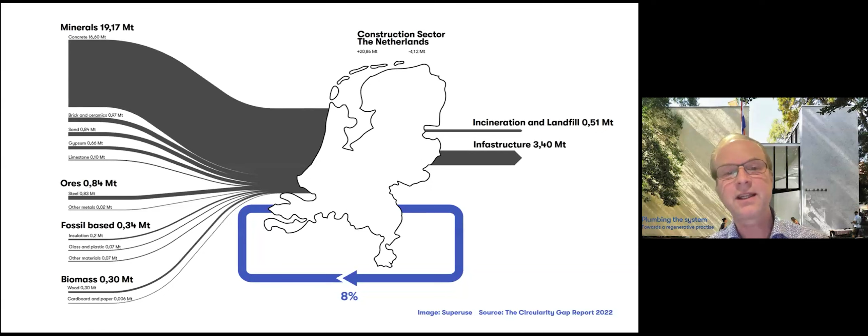When we started our office, we thought it's enough to just show it's possible, to prove with built examples that already today it's possible to realize buildings with over half of the materials being reclaimed. One of our first built examples was Villa Welpeloo, a house for 2 art collectors in the east of the Netherlands, who allowed us to build this house according to our Superuse philosophy.

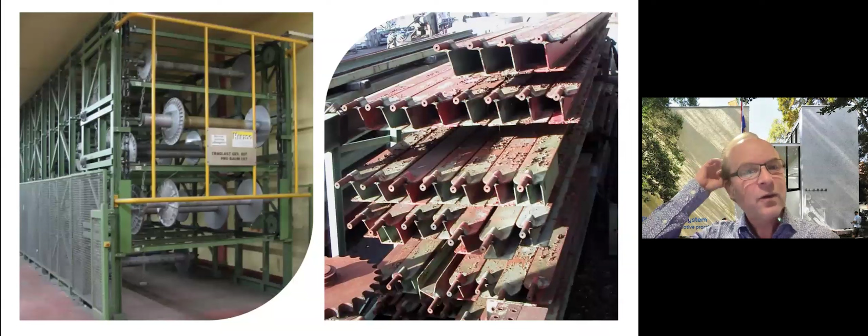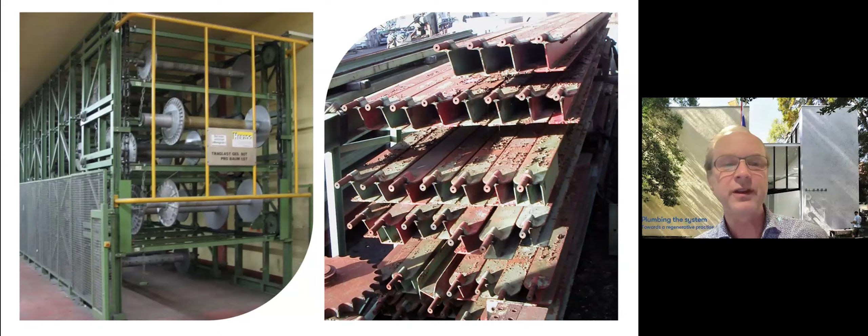What we used were steel beams from a steel textile machine that we bought and turned into the main construction of this house. We didn't know any specifications, but together with a structural engineer we were able to work on this project and realize it, and calculated that we saved around 90% of CO2 emissions by repurposing steel instead of recycling steel.

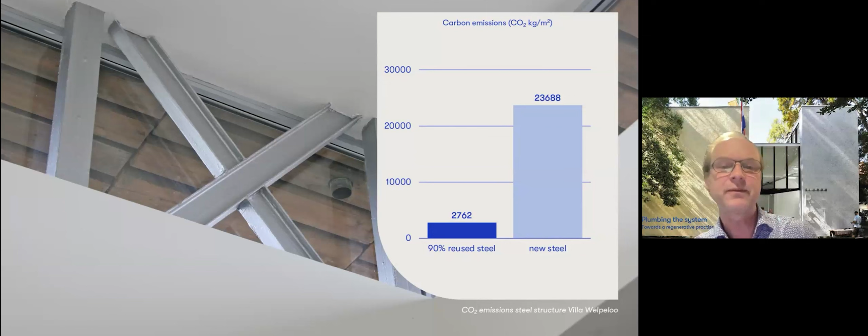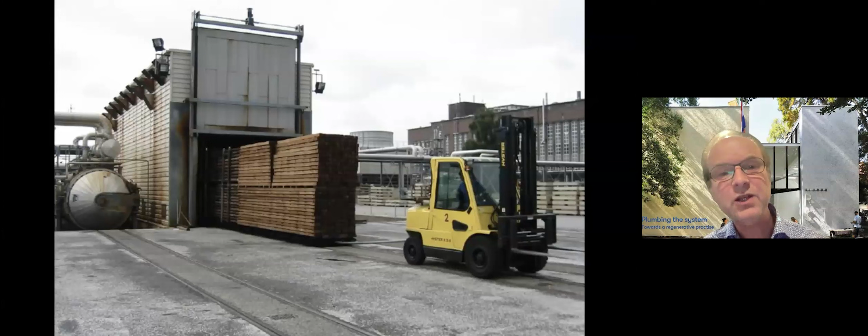Another material we used was wood. The whole facade has been made of cable reels, a material that becomes redundant after 5 years of use. The boards are very sturdy, same-size boards that we could use for our facade. We found a treatment that actually enlarged the lifespan of this material up to 35 years of guarantee.

Unfortunately, this factory that treats this with just steam was 100 kilometers away. So here I must say that we were actually able to have a design that was the result of the size of the materials - that's how we design. But the CO2 emissions were not that much less than using new wood. Of course new wood has a low impact, but because of the transport we only gained 20% compared to using new wood. These were 2 of the examples we learned from and could employ in other projects afterwards. We realized this project in 2009.

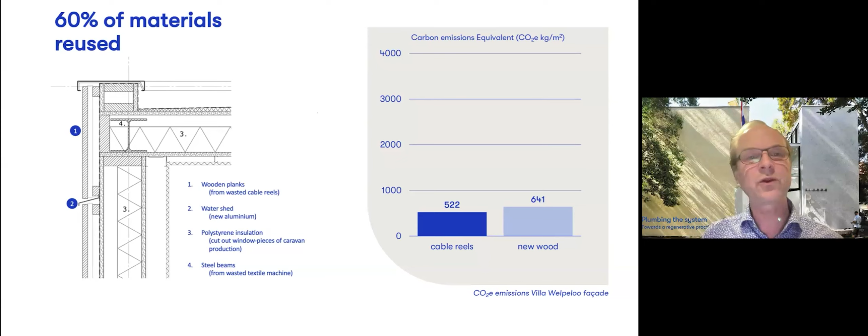Today we need other tools to understand and be able to work in this same way. That's why we invented a platform called Harvest Map, which allows other designers and builders to work with the knowledge we gained. After 15 years of working, we had many different sources of materials that we knew would be applicable in construction, but that we wouldn't use because they were not local to the project we were working on at that moment.

So we made a map with over 250 resources in the Netherlands, with many different varieties of applications - for instance parts from trains, buildings that were demolished, as well as furniture that was taken down.

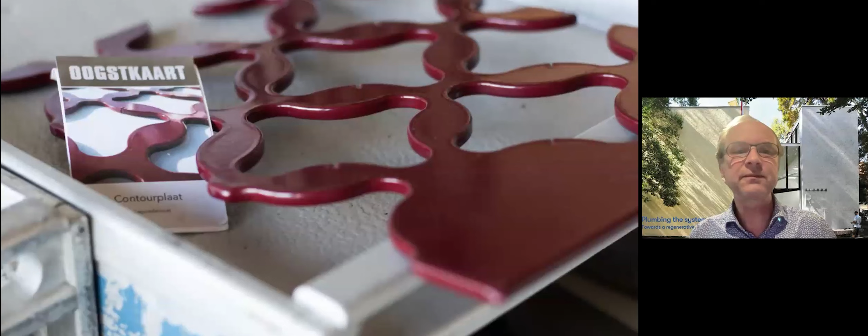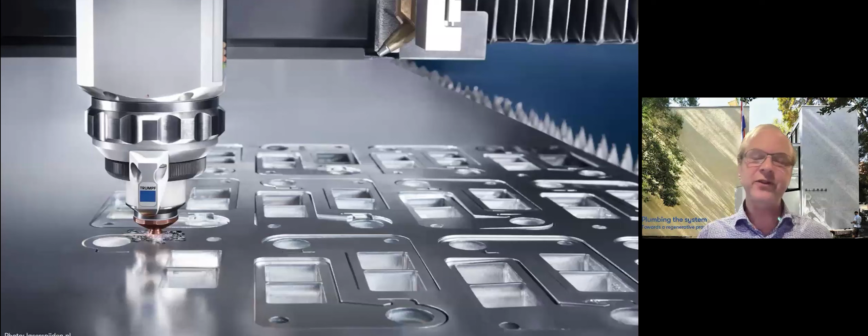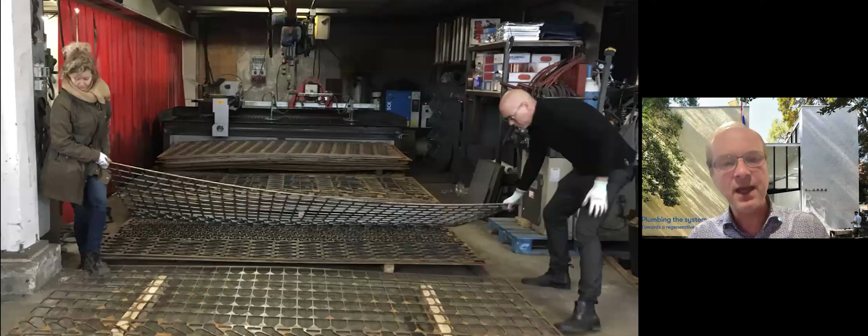One of the materials on the Harvest Map is this one, it's one of our favorites. It's called contour sheet — the remains after the steel industry takes out different parts for the car industry, leaving a steel sheet of the same size, though thickness and type may vary. Instead of scrapping this into small parts and transporting it around the globe to turn it into a new product like a fence, we buy it directly from the factory at a 3 times higher price and apply it for buildings. This can be used for fences, like next to the villa I just showed, to grow plants and give a bit more privacy.

But as well, other architects hire us to matchmake the supply with the need, here for a facade of a museum in Amsterdam.

And we had this same consulting matchmaking role for this large venue and waste collection center in the center of The Hague, where the municipality, for the first time, set the brief on the highest amount of upcycled materials that would be possible.

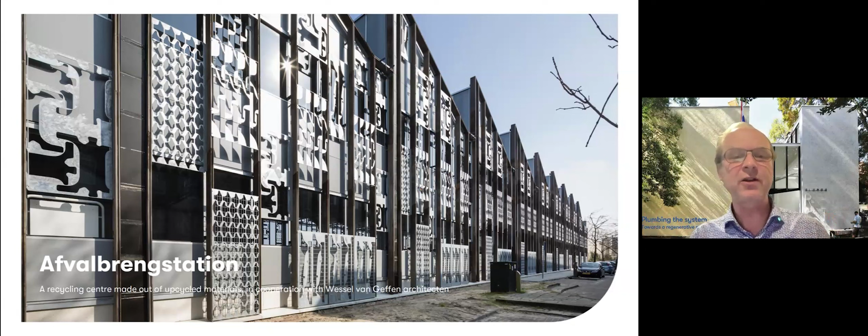The nice thing about this project is that it's not just a skin for any program, but the collection of waste material by the general public is the core of the project, and the aim is to upcycle these materials in the future. We rather call this a resource palace than a waste collection center. That's what we need to go to — to really give materials that used to be waste a higher value, also in how they're looked at.

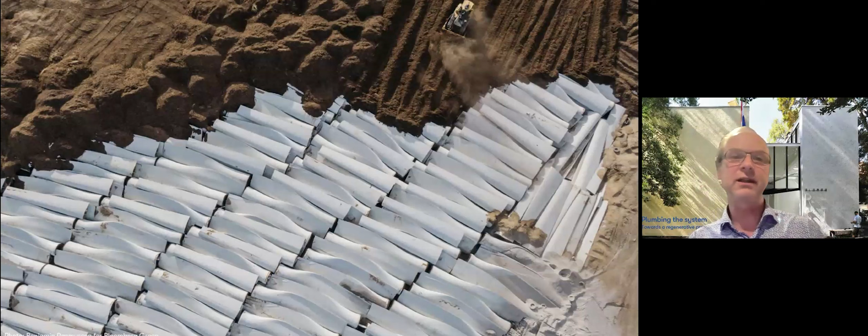Another material we use very often is blades from wind turbines. Our green energy does not just use green resources — it provides green energy, but the materials they're made of are actually glass fiber and polyurethane. They were never invented to be recycled or upcycled, and for a long time they've been put in landfills or, in Western Europe, incinerated, while this is a very high quality material that can live for at least another 50 years.

So when we were commissioned for the playground in the city of Rotterdam, we had just learned about this new material and used 5 of these turbine blades to create an exciting new playground, where we drilled a couple of additional holes and connected the existing stainless steel parts, which could live for another 50 years as well. Kids very much like it, because you can't just play over it, but also play hide and seek inside it. Again, we were able to save 80 to 90% of CO2 emissions by not using new materials and not having these turbine blades incinerated.

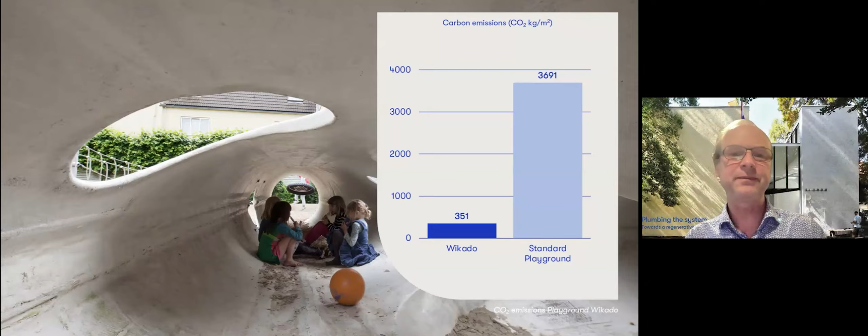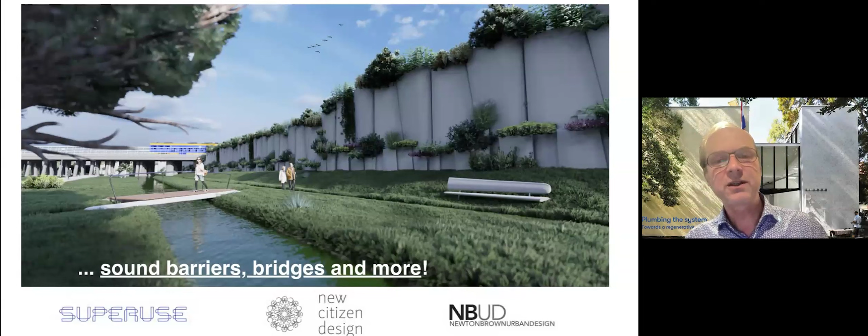Since the flow of these materials is enormous — every year tens of thousands of blades are being decommissioned in the coming years — we started to look at larger scale applications, because we cannot absorb all the turbine blades just for playgrounds or urban furniture. So currently we're looking into sound barriers for railways or roads, which have a multiple function: to store water and to grow green, diminishing the amount of fine dust generated by roads and railways.

Since this year, we branched Blade-Made into an independent company because we have a growing demand for these products, and this company can really dedicate itself to the application of blades in the urban environment.

If we look at more historical wind turbines, we think they might be much more intelligent than the ones we are building now. The current ones just have one function, one output, but 400 years ago in the Netherlands we were able to build buildings that harvest their energy, fabricate new products, house the people who work there, have a shop to sell the products, and were built out of natural materials and could be dismantled and put up somewhere else. A completely integrated design - this intelligence we lost a little bit in past years, and we started calling this cyclifiers as a new function in our city with the contemporary flows we have to deal with.

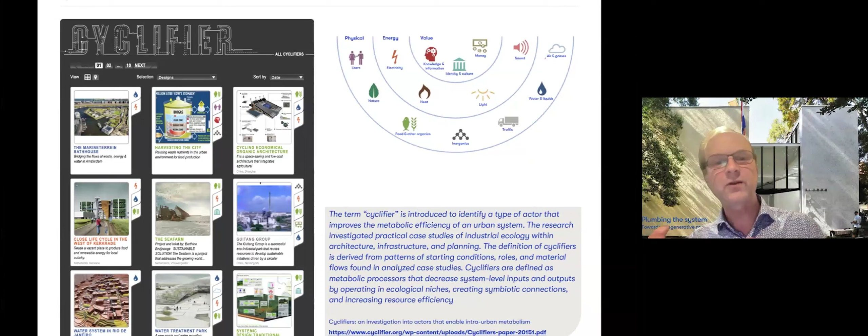We're currently looking at 14 different flows in cities and trying to see how we can create more value with what is available.

One of the cyclifiers, actually I'm presenting from this location, although my background may look like I'm in Venice, is Blue City. It's a former tropical swimming paradise that got derelict in 2010. With a group of entrepreneurs, we were able to acquire this building and transform it into a hub for the circular economy.

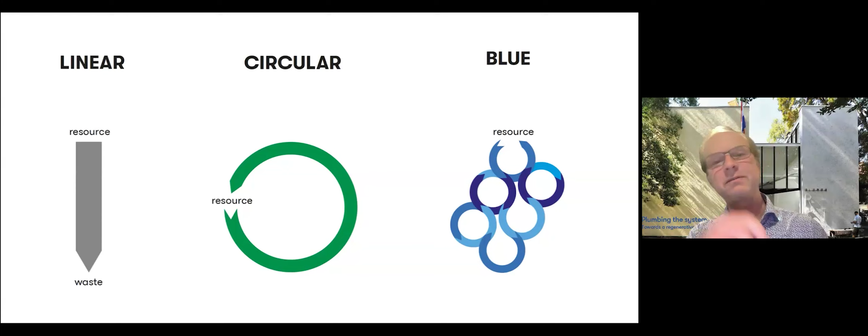I have to make a small addition to what we call circular, because the transition from linear economy to circular economy usually means materials are cycling in a closed loop. But if we look at nature, a leaf falling from a tree never becomes a leaf on that tree again. So we are more looking at an open system, more natural, where resources that become waste can be absorbed by other companies, creating the highest possible value, and in their process have resources that can be used by other companies again. It's more like the blue economy, which is more dynamic, interactive and open.

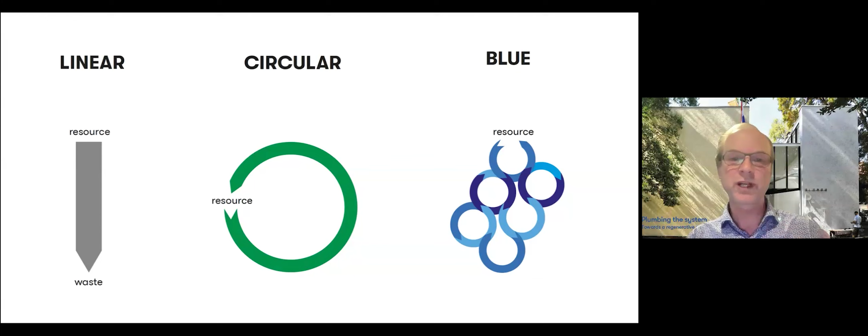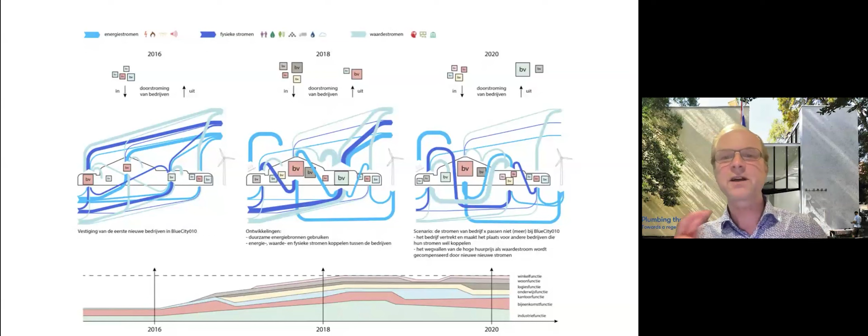In Blue City, we made a system where in the beginning we have only a few companies, but by plugging in more companies, they can start to exchange these resources with each other.

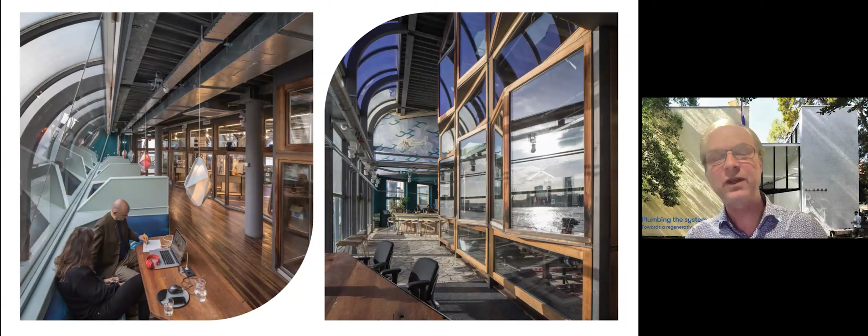We started with creating office spaces, having 90% of reclaimed materials applied here. This was really a nice challenge to see if we could create this office environment only with reclaimed materials. We also have a central lab for the now 55 entrepreneurs in Blue City, and the ability to actually create new building products.

After the building is completed, in this case the laboratory, we calculate the amount of CO2 that has been saved by implementing harvested material compared to new material.

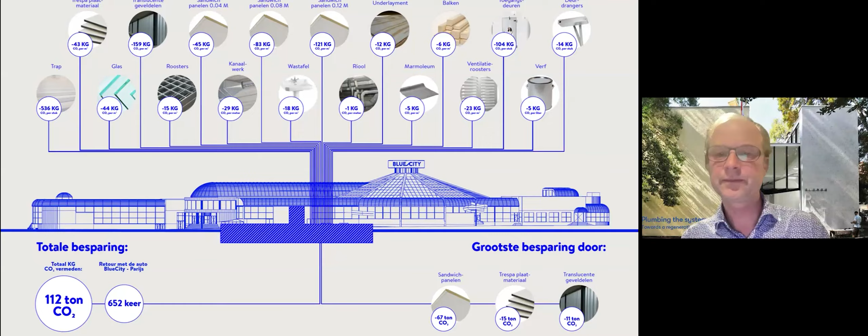Blue City is an ongoing project. A project that just has been completed is this one in Den Bosch. It's a former public facility building that was built in the 1980s - not very nice, but interesting that a housing corporation decided this location should be demolished and turned into apartments for new renters.

But there was already an organization of 15 people who temporarily used this building, and they suggested not to demolish it, but to become renters and refurbish the building.

So we made an analysis of how we could use the existing structure, build on top of it using the existing foundation, keeping most of it, adding an energy system that uses the passive energy generated by the building envelope, have a green roof and garden system where most of the food they consume can be grown, as well as collecting the water falling on their apartments for local use.

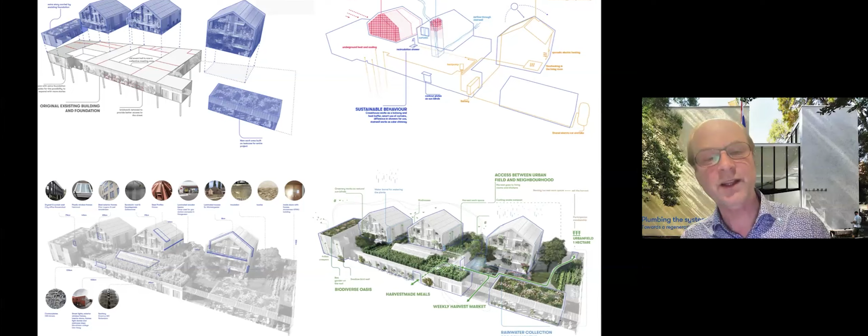And of course to have most of the materials harvested where we built new, on the parts where we built new apartments. This was the design we made 4 years ago, where this is really a new vision on how social housing could look like.

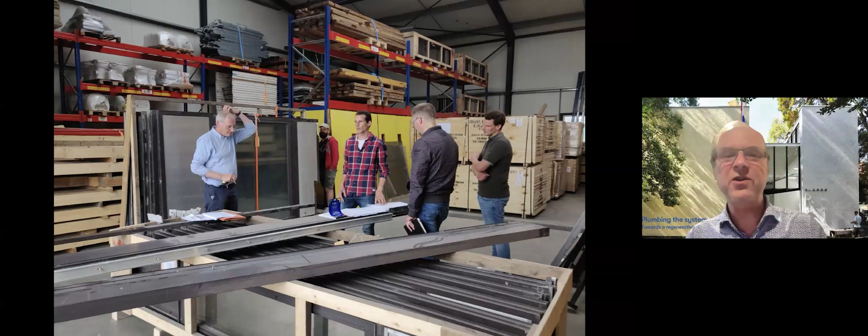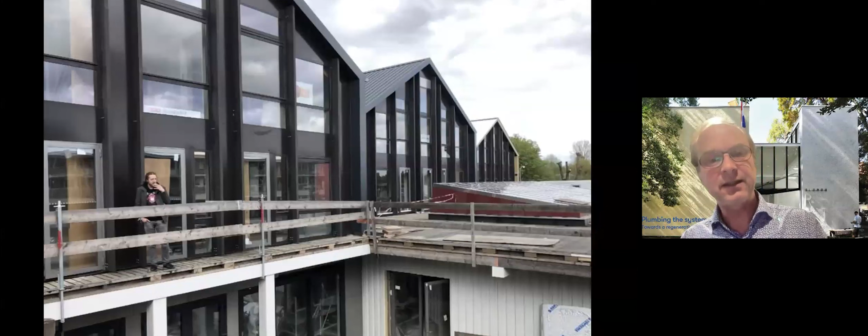This didn't stay a dream - 4 years ago the construction started, materials were collected, different materials were stored in a large storage, and with the help of the community that is going to rent their houses, materials were prepared and then applied by the contractor. In the end, the local community also finished their own houses.

The whole building has been completed by the end of last year, but was actually opened 2 weeks ago, and now the green is growing.

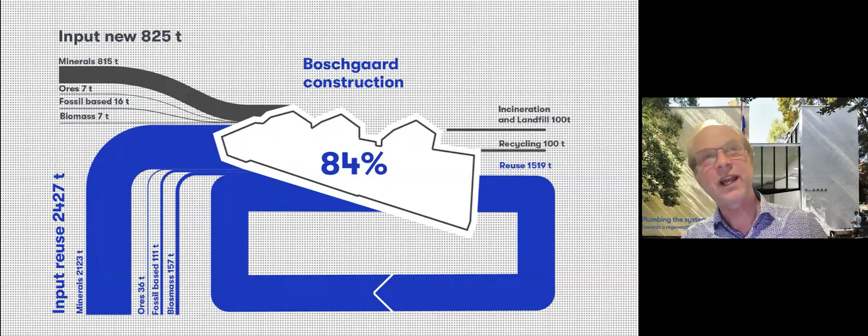What is nice is that in such a project we're able to realize a circularity of over 80%, which is more than 10 times the standard currently in the Netherlands. We think this is only possible if you collaborate with the local community, because they set their own circular and sustainable ambitions, and collaborating with them as an architect and housing corporation creates much higher sustainable improvement than doing this top down. So we think that's an important step: sustainable development should be done with a collective, from bottom up.

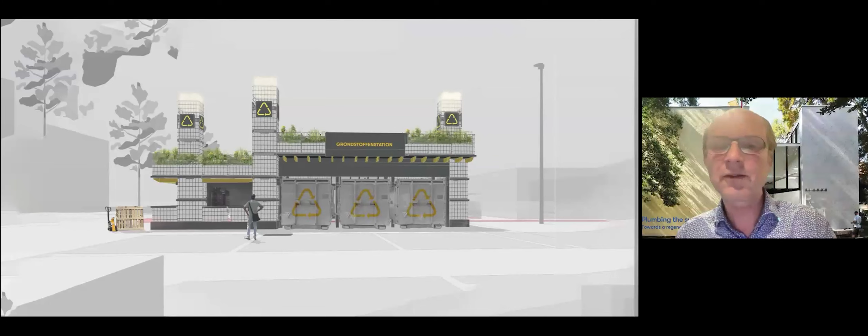Another very nice example of a cyclifier and bottom-up initiative is for the market in Rotterdam, one of the biggest open-air markets in Western Europe. After a day of market there used to be a lot of waste, collected by the municipality at the end of the day. A local cooperative made a claim, a right to challenge, to be allowed to collect the waste already during the market, to store it, sort it, and create more value with what was wasted. So we designed a resource station for that organization to support that whole process.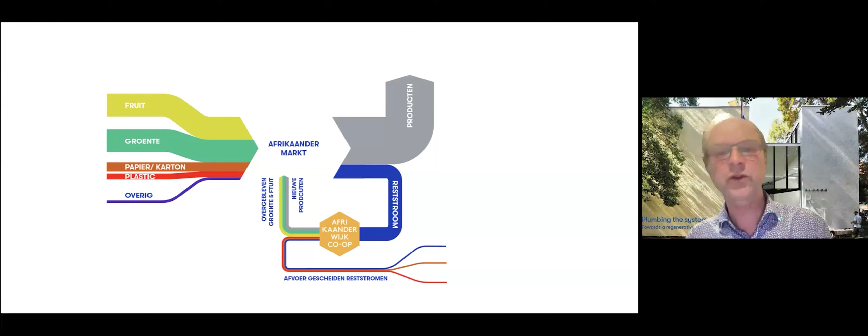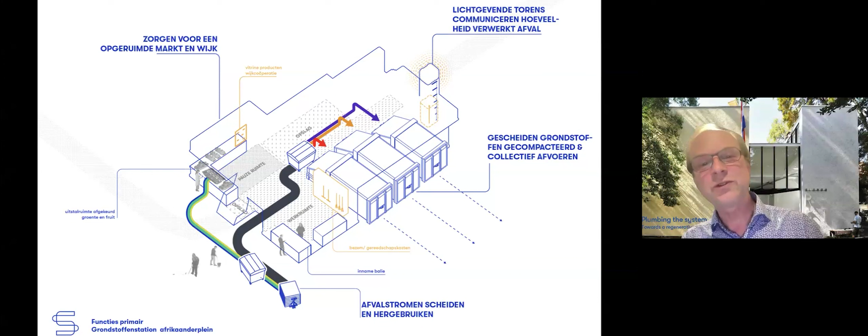The whole design developed quite a bit. It was a process of over 5 years in Rotterdam, dealing with many different parts of the municipality that had to collaborate, and they didn't know how, especially with a local cooperative and private organizations. It's not that easy, but we managed to design something we could build. This shows the industrial space inside where all these materials are separated and sorted, but as well outside we created completely new urban functionality for the city of Rotterdam by adding a running track over the station.

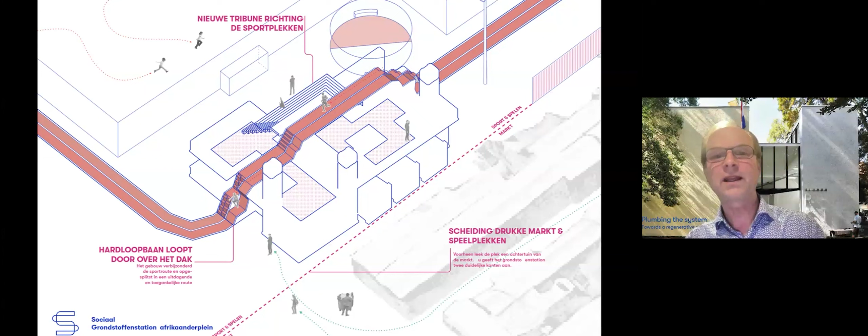And a grandstand to watch the football play next to it. We realized this last February, and again we're really very happy that we were able to realize a project with over 90% of reclaimed materials.

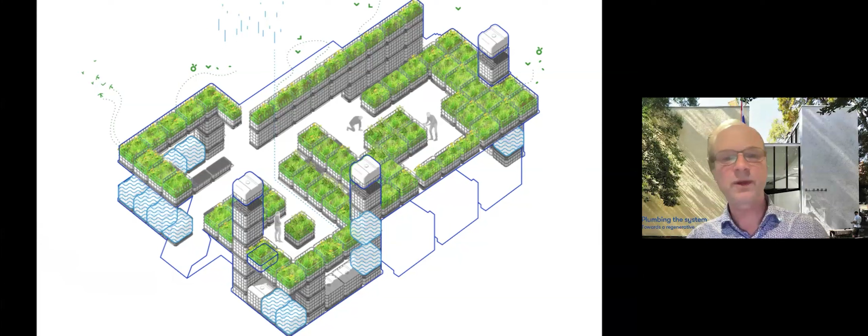One of the materials that really speaks are the liquid containers that come from the food industry. We could use them here to store water from the roof, but also to grow plants. In this case, each tank is a garden, actually managed by one of the school kids from the school you see behind, one of the tenants of the resource station.

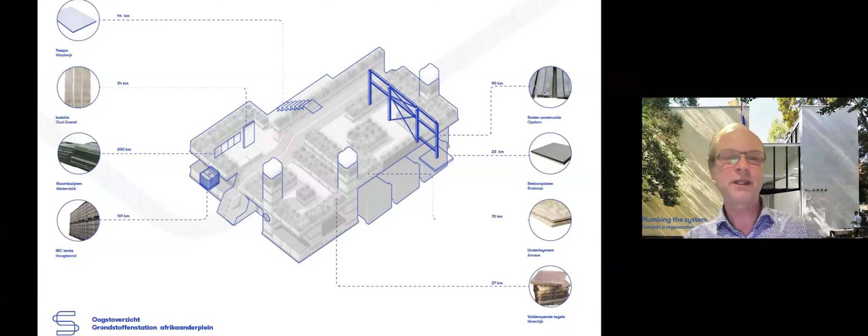This whole design and even the construction has been really locally supported, so it's designed with and built with the people who are actually going to use this. This again gives a lot of pride to the people working in it. And of course, we collected over 90% of reclaimed materials from a maximum of 200 kilometers from the site.

It's very nice that the project just last Friday won the Rotterdam Architecture Prize. So even now, in architectural organizations that are looking at where the future is heading, this kind of development is really seen as something very promising, as a new process.

I'll conclude with a more systemic look at our practice as an architect, because after working for over 25 years, we also discovered it's not just about creating new tools and showing that it's possible, because we found a lot of obstructions from all kinds of context we currently have to deal with. One of the important ones is our economical context. So that's when I became curator for the Dutch Pavilion in Venice.

I invited Carlijn Kingma, who made this incredible drawing called The Waterworks of Our Economy. She is an architect and took the system of money and translated it into a water system. This shows where the water and the money ends up, who gets more wealthy, and who doesn't get a drop from it anymore. She drew this by hand over 2,000 hours and 2.5 years of very deep investigation with banks, government institutes, etc. So it's a very well-informed visual of how our economy works.

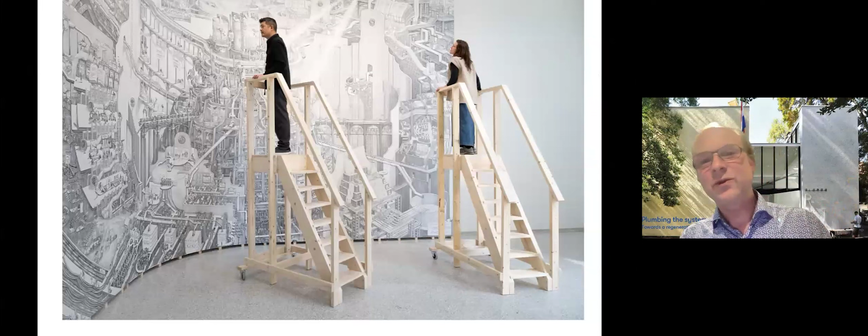We turned this into an exhibition, which you could actually more or less enter live, but we also started to look at what we can learn from this economy. I want to show two important drivers of why in general it's very hard for architects to work in a sustainable way.

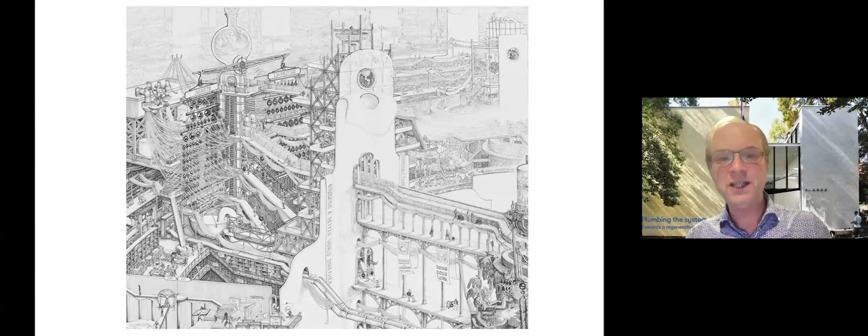One is on the left top, that's where money is generated. When you take out a loan, new money is created, and this leads to a very unsustainable need to grow. When someone gets a mortgage, 20 to 50 times that amount of money is actually generated and flows into our economy. But of course this mortgage has to be paid back with interest, aiming for a new growth model.

So we translated this into a simple idea: if we want to move into a more circular future, we cannot continue basing it on debt that has to be paid back with interest, aiming for high profit later. Instead we have to step out of debt and think more of a sufficient economy, where the money is enough to do what is actually needed.

The other part is at the back end of the system, where taxes are gathered by our governments. What we see here are the tubes of the taxes — the largest tube is income tax, the tax on labor, and a very small tube, even called 'other taxes' here, is on resources and materials, for instance.

That's what we also discovered. So five years ago we started to promote what we call the tax shift, because currently labor taxes are very big while taxes on CO2 and emissions are very low, which makes it very unprofitable to put in the additional effort of reclaiming materials, repairing them, storing them, or renovating buildings — the competition with new materials and new buildings is really very tough.

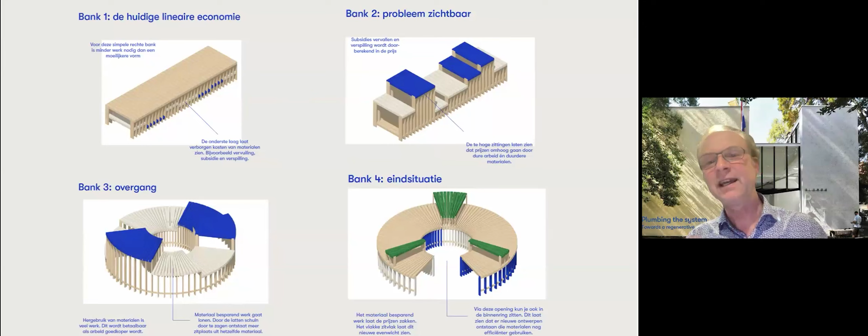The second bench shows that if you make the hidden cost more visible, it already starts to become less comfortable. If you lowered the amount of labor cost, you could cut every beam in half and make a round one. But as I said in the beginning, we want an open economy, so the bottom right one is the open one, where with low labor we have much more functionality even on the inside of this circle.

We built this as an interior for the tax office, including some instructional 3D pictures showing the possible transition, hoping to stimulate the employees of the tax office to think about this.

In the meantime, we were able to do some research on buildings — what would actually happen if you changed the taxes and how this would influence decisions on our work. We're really happy that in the first petition only one bank supported our bid, but currently all the banks in the Netherlands have made an agreement with the Dutch ministry to research this tax shift and see how it can stimulate our more circular economy. So we see the momentum for this growing very much.

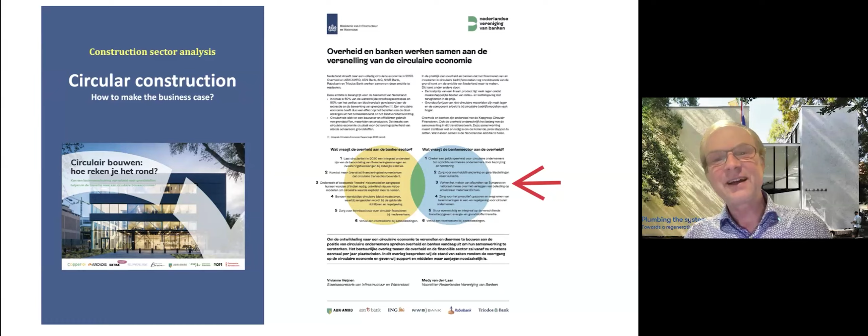So it's not just enough, we feel, to create tools, but also to look at our surroundings, understand how the systems are working, and where obstructions are made that we also need to redesign, in order to create a better environment for our way of working. I hope this inspires you to work on these ideas in Canada as well. Thank you very much.